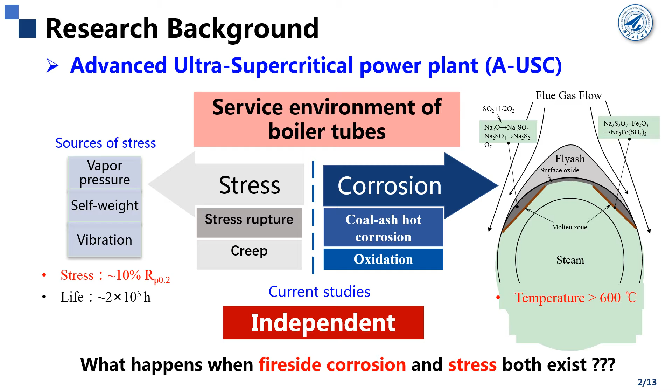Unfortunately, in current studies, the failure caused by stress and the failure caused by corrosion are investigated independently. So the problem is what happens when fireside corrosion and stress both exist. In fact, in our early study, when we compare the creep rupture life of Super 304H in static air and in the simulated fireside corrosion, we find that the creep rupture life can be greatly deteriorated by fireside corrosion, and it becomes more significant under lower stresses.

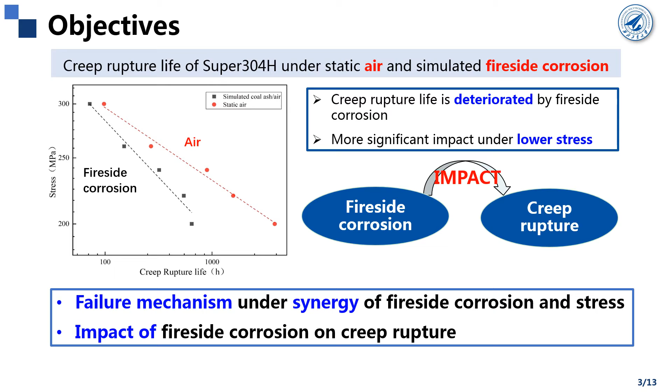So the objective of this study is to try to find out how fireside corrosion impacts the creep rupture behavior. So in this study, Super 304H steel was applied as the raw material, and its creep rupture life was tested in static air environment and in fireside corrosion environment respectively.

Then we can achieve the creep rupture life, for example, under the stress level of 220 megapascal. And the lifetime in this environment is determined to be 546 hours in corrosion side versus 1580 hours in air condition. So that is a big reduction in creep rupture life. And then the specimens after creep fracture were investigated in terms of their surface products and the characterization of microstructural evolution in surface layer.

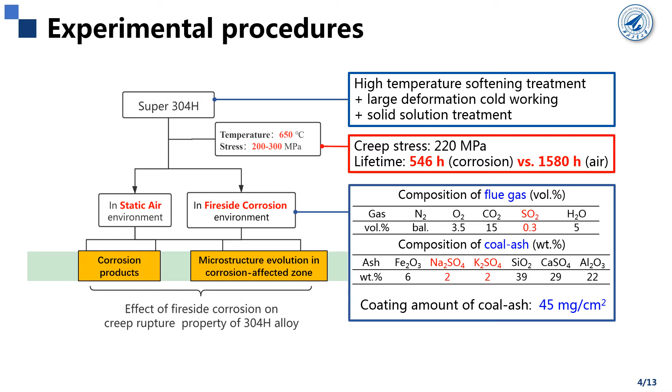So next we're going to talk about the results and discussion. First, we focus on the corrosion products on surface. This page shows the surface morphology. And first, we look at the condition in air environment. We can see that the oxide scale formed in air condition is continuous and compact with some nodules and with some very small cracks.

On the contrary, in the fireside corrosion case, we can find the scale is detached from the substrate and we can find many cracks, and also we can see the corrosion pits form in the bare matrix surface.

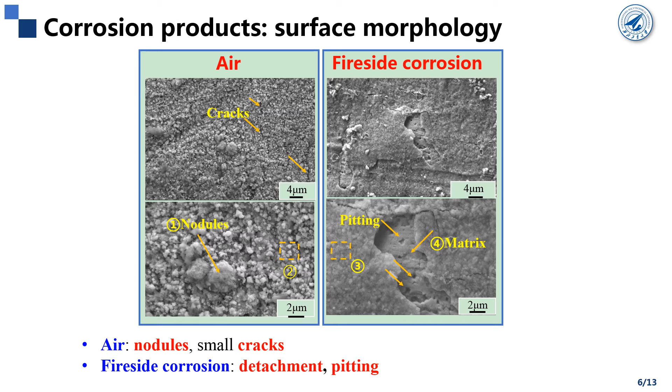And then in this page we go to the cross-sectional morphology, and in this global view we can see the oxide layer is very thin and very adhesive to the substrate. If we show more details on the surface layer, we can find the oxide layer is very compact and well attached to the substrate, even along the creep cracks, which are caused by the tensile stress during the creep test. Based on the mapping results by EDS, we can find the oxide scale is mainly composed of chromium-rich oxide.

Things are quite different in the corrosion case. The first important one is that if we look at the surface layer, we can see the oxide has been detached from the underlying layer, which means in this case the oxide formed on surface is less adhesive to the substrate. And also in some local areas we can find very thick and loose products. And within these products, many cracks form during the creep test. And these thick products formed on the surface will decrease the load-bearing area of the specimen.

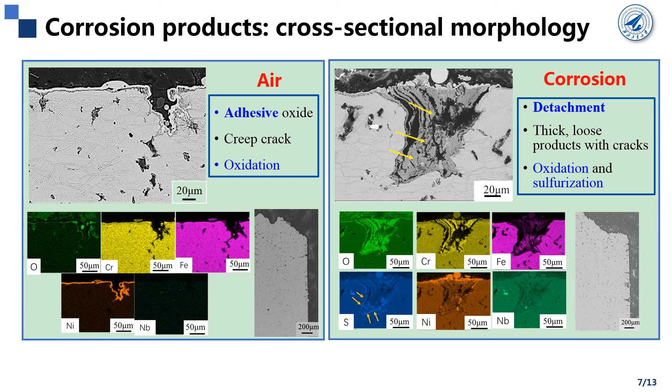And what's more important is the sulfur concentration, which we can find in the mapping result of sulfur element in the corrosion frontier, which means the corrosion process in this case is controlled by oxidation and sulfurization together.

In this page, we give the XRD patterns, which include the creep rupture specimens together with the raw material. Then we can find the surface products are mainly characterized to be manganese chromium spinel oxide and the chromium-rich oxide containing iron. And the as-received 304H steel is austenite, that is FCC structure.

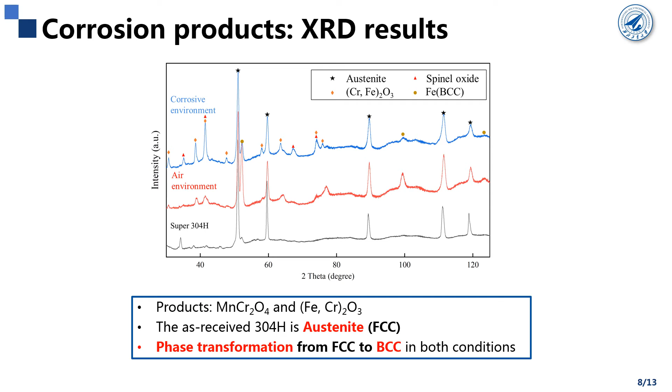However, after the creep fracture, we can find the existence of BCC iron structure, which means the phase transformation occurs from FCC to BCC structure in both testing conditions. Well, since the phase structure has been changed after creep fracture, in the next part we're going to pay more attention to the microstructure evolution in the surface layer, especially in the area where corrosion affected.

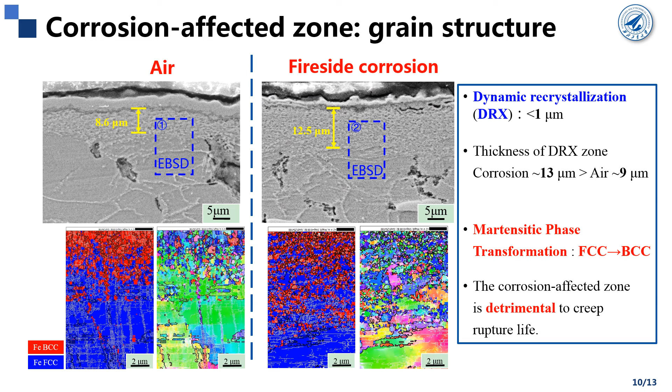And the thickness of the recrystallization layer in corrosion environment is apparently larger than in air condition. That is 13 micrometers versus 9 micrometers. Well, another important thing is that the mapping from EBSD scanning also proves the phase transformation from FCC structure to BCC martensite. And this is consistent with previous XRD results.

To find out why this happens, we measure the chromium concentration change as a function of the depth to the surface. And then we can see that chromium is significantly depleted in the surface layer. And the thickness of the chromium depletion layer in fireside corrosion is apparently larger than that in air condition.

Well, since the measured chromium depletion layer covers the layer for recrystallization, it is reasonable to consider that the occurrence of dynamic recrystallization is associated with chromium depletion. And that is because the chromium loss in the surface layer helps to lower the threshold of the temperature and the strain for the occurrence of recrystallization.

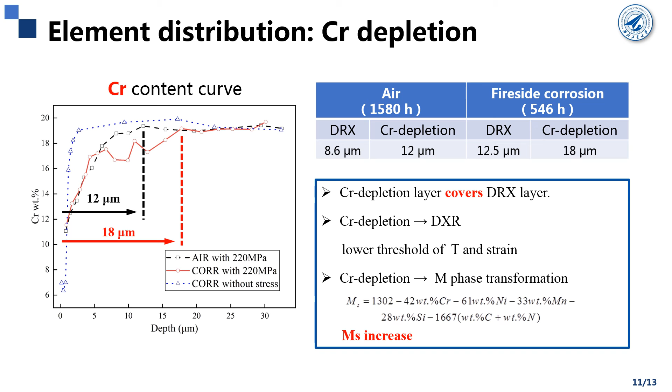And on the other hand, it has also been reported martensitic phase transformation is also favored by the surface chromium depletion, because the martensitic phase transformation temperature point, here termed as MS temperature point, can be increased by the decrease in chromium concentration in the alloy. So this facilitates the occurrence of martensitic phase transformation during the cooling process to room temperature.

So finally, the failure mechanism of Super304H steel, which is also a promising candidate for boiler tubes in AUSC power plants, can be illustrated by the following schematic. Well, for now, we are pretty sure that the fireside corrosion is going to induce the cracking and the delamination of the oxide scales formed on the surface, as well as the pitting in the bare metal.

And from the perspective of corrosion products, the scale detachment will reduce the effective load-bearing area and also aggravates the surface damage. Well, from the perspective of microstructure evolution in the surface layer, we have confirmed that the chromium depletion leads to the grain refinement through dynamic recrystallization.

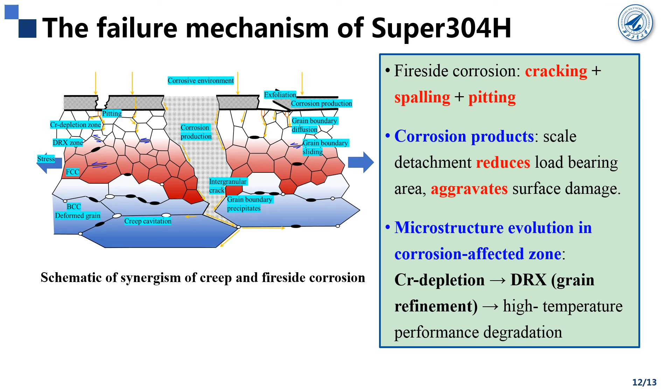And this will produce a large number of grain boundaries in the surface layer, which are negative for the high temperature deformation during the creep test. So that's why the high temperature performance has been deteriorated to a large extent. And finally, we have the following conclusions, and I will not repeat them one by one.